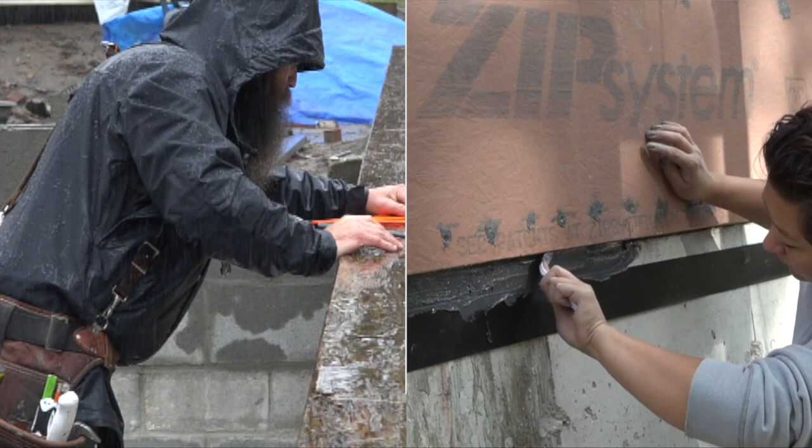Airtight walls in the real world. WRBs, flashing and redundancy. Now that we've gone over the basics of how heat, air, and moisture can move through building assemblies, or at least how they work, we can look at how to control them and make them do what we want.

So I'm going to explore a couple of ways to improve the layers that are already in the blueprints, starting on the outside of the wall with the house wrap, or WRB, as it's called in the code. In the code, they call a WRB a water-resistant barrier, but building scientists call a WRB a weather-resistant barrier. The main difference is that weather includes wind and different pressures. So a weather-resistant barrier incorporates wind and air pressures into the performance of that outer layer, which is protecting the framing. So first we'll look at house wrap as a WRB.

House wrap initially is a water-resistant barrier. If you want to upgrade it to an air barrier, weather barrier, you can just do a couple of little things to make it much more airtight. As usual, the tricky stuff isn't in the middle of the wall where there's no action, where there's no windows, no holes. The tricky stuff is where two different things meet or two perpendicular things meet. So like where wood and concrete meet or where a roof and a wall meet.

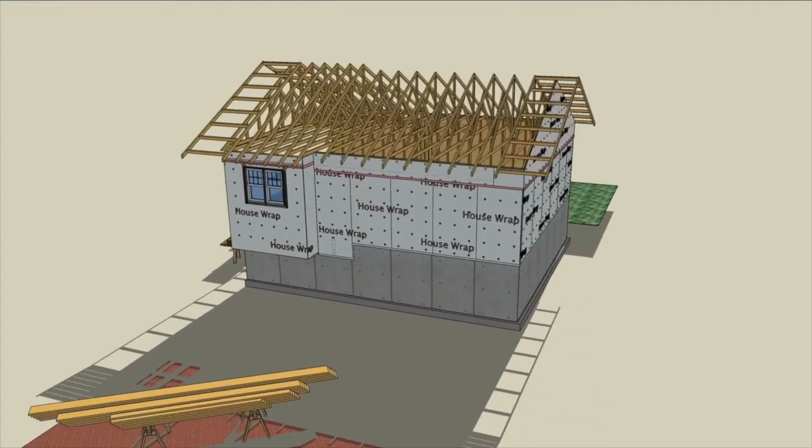So this is an animation based on Doug's installation advice for house wrap and the basics of controlling water and air. Weather barriers done right means weather barriers that go to work on more than just the sunny days. Weather includes moisture, wind, and rain, so it makes sense that a weather barrier would aim to stop all of that, because it's not always sunny like it is in animation land. Begin at the bottom of the wall where the house wrap is sealed to the foundation with silicone caulk to bridge the gaps between wood and concrete.

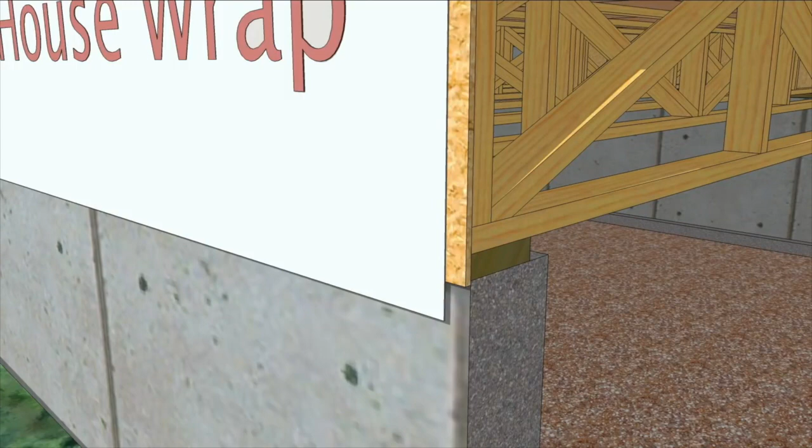Anyone who's ever run siding knows that if the house wrap isn't tight in the corners, it'll get sliced with a utility knife. So get it tight or say goodbye to your air barrier. Overlap the vertical seams 6 to 12 inches.

Here, the house wrap is run all the way into the corner and the next piece run out about 1.5 feet because there's a couple of wall elevations at the bottom and the installers wanted to get a good overlap. Tape the seam with contractor tape.

Run a bead of caulk along the top of the wall to seal the top of the house wrap. Sometimes it's easier to do this after the house wrap has been placed. Either way, overlap the higher pieces in front of the lower pieces so that water is always directed out.

And don't stop at the top of the insulated space. House wrap is the drainage plane on gables too, so it has to cover all of the wall sheathing.

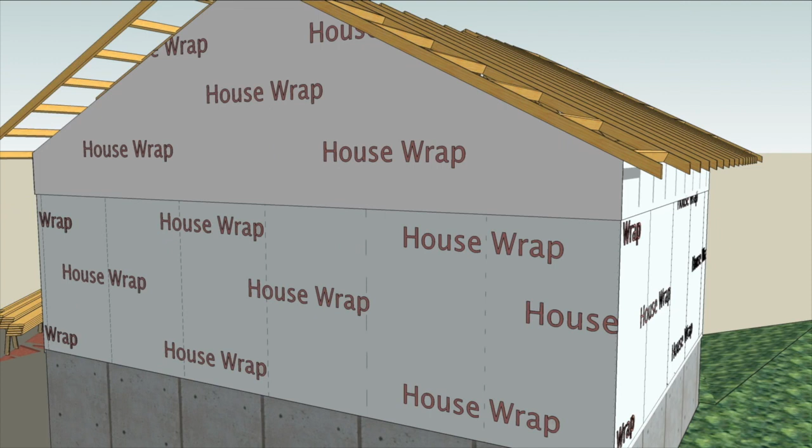It's a good idea to tape the seams before going too crazy with the cap stapler because a partially taped over cap can become a water injection system into the tape, which can become a trough for sideways water movement. So keep the cap staples away from the tape.

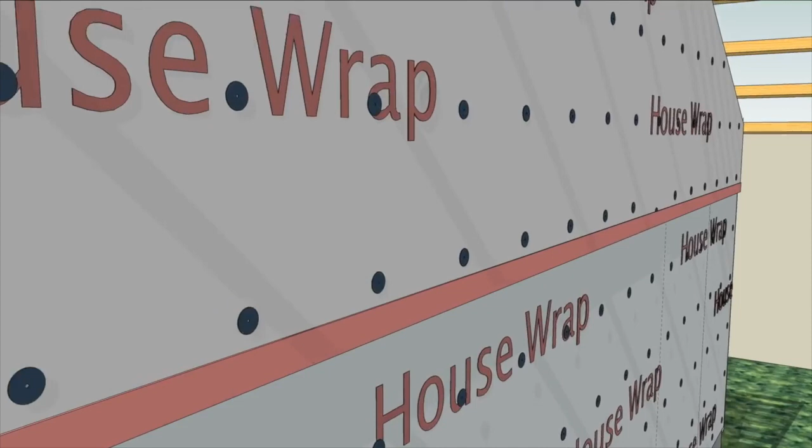The same is true at windows where there's a lot of flashing tape. Keep the cap staples about 1 foot away from the opening on each edge and leave plenty of room to splice the window into the wall.

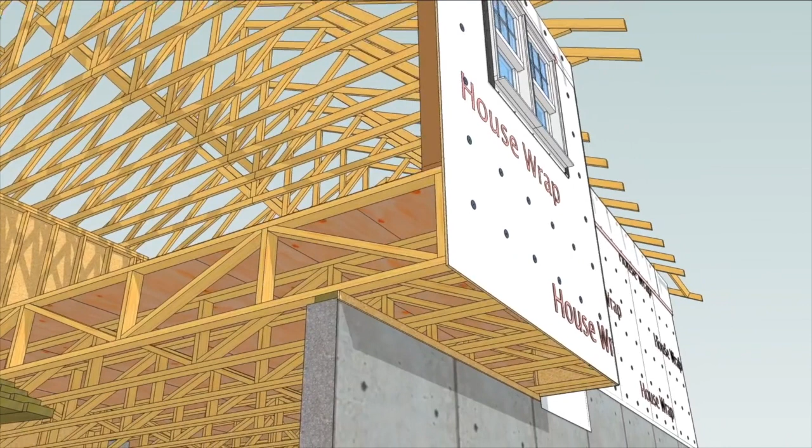Another sneaky spot that can turn into a massive air leak is a cantilever. At a minimum, cover this opening with house wrap, but something rigid is better, like wall sheathing. Of course, both sheathing and house wrap is best, and that detail is a topic for another video.

So that's sort of a how to do it in the perfect world animation. But unlike animation land, the real world has mud and ladders and guys with tattoos climbing ladders with mud on their boots. So here's a real crew doing it in a pretty good sized addition to a 100-year-old house that I shot a little while ago.

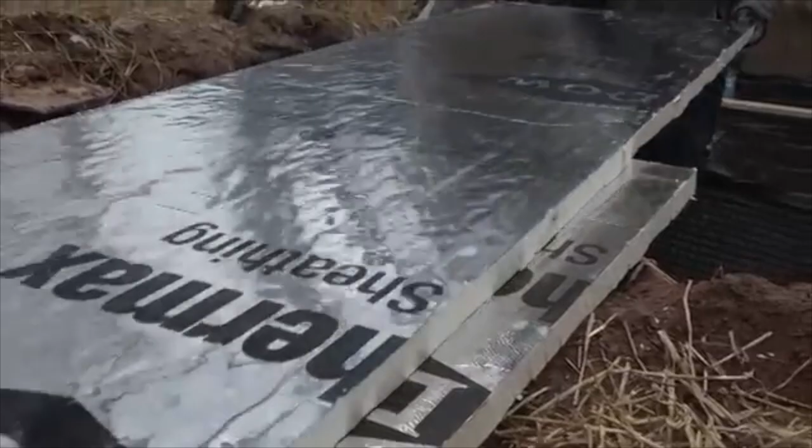Last week, we made a cold, wet hole into a warm and dry crawl space using Thermax polyiso foam board and smart plastic strategies. Because we found that when we do this and we have the gravel down, as you're working on it, you stretch it out and you're walking on top of it, sometimes you can start to tear, rip, or puncture your plastic.

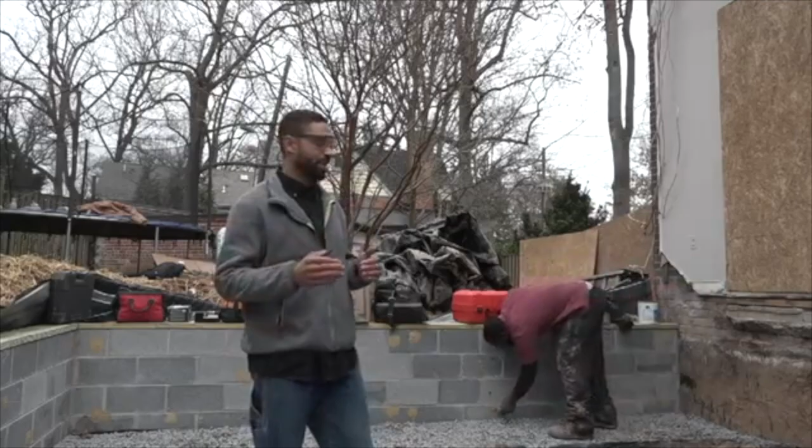So what we do is we take some of the leftover stuff that we've got, put a couple strips down, so that way when we put our 6 mil or 8 mil on top of it, and you're walking on top of it, you're not actually creating holes in your vapor barriers. They sealed the new crawl space to the old building with Great Stuff and moved on to the framing.

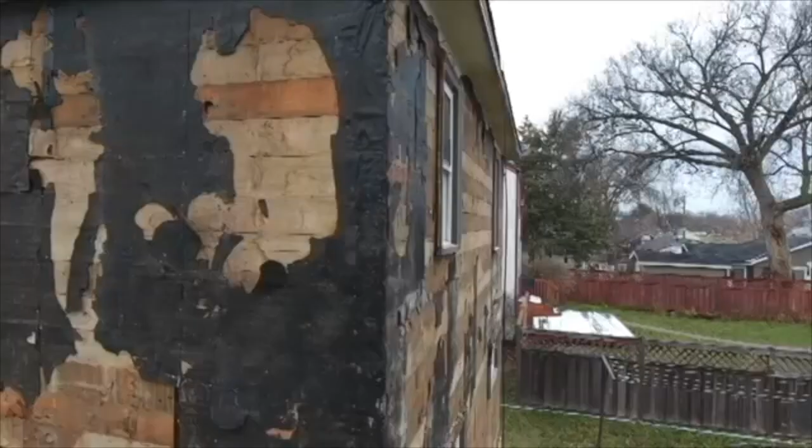In this episode, we're going to learn why the WRB is such a BFD. What we're talking about today are weather-resistant barriers. Back in the day, that used to be tar paper. Tar paper would dry out and crack. It did not handle weather or UV very well. Nowadays, we have longer spans between putting up our siding and our windows and doors.

Important factors about the WRB, weather-resistant barrier: it's an air and water barrier. So when it rains, the rain drains down the side of it. It's going to continually move water away from the house.

Another thing that's really important about a WRB is its permeability, which means the amount of vapor that it can transfer through. A lot of times during construction, it's built during rainy days or weather, and you want that plywood to be able to dry out and not be stuck behind a vapor barrier that won't allow any moisture out. Okay, let's pause a second to make a point of that.

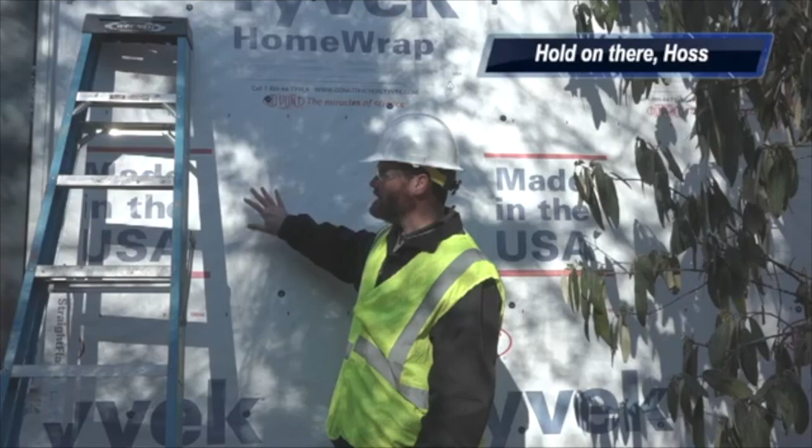Pro Tradecraft travels all over the country to job sites, and we see this on blueprints a lot. In fact, Tyvek is not a vapor barrier. It allows vapor to pass through it and dry out through diffusion.

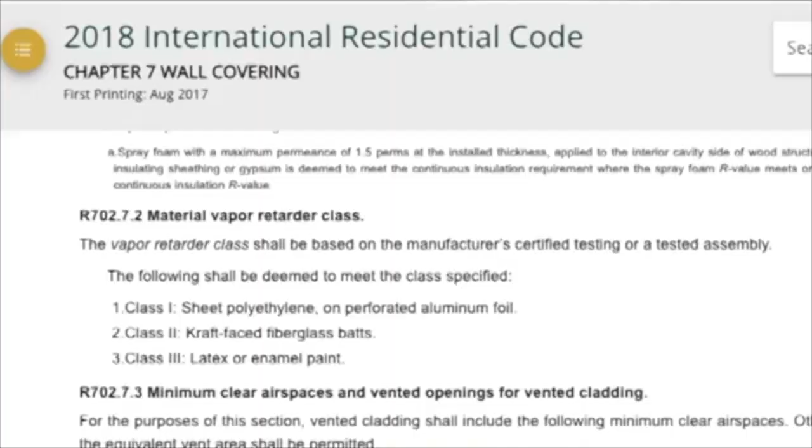A vapor barrier would be like a solid piece of plastic that is not going to allow any air or moisture through it. It is a water and air barrier. It allows vapor to pass through it through permeability. Tyvek is not a vapor barrier.

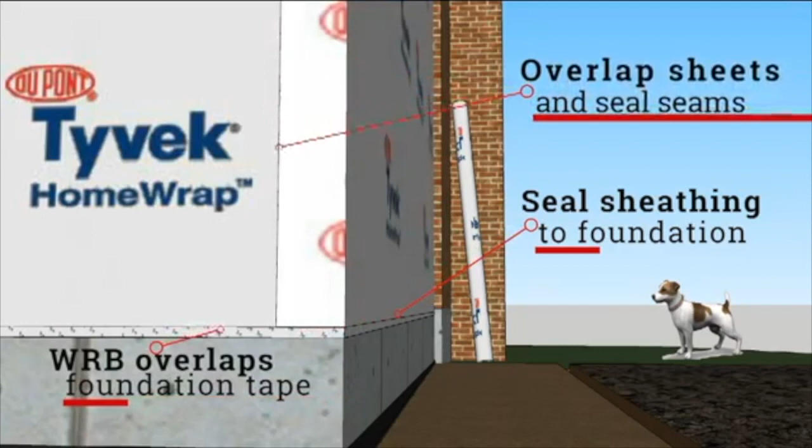Now that we've cleared that up, let's move to animation land for a strategy session. The general strategy for using house wrap as a water barrier is to cover all the seams and gaps in the exterior sheathing, overlapping correctly. To upgrade Tyvek to an air barrier, seal the top and bottom as well as the vertical and horizontal seams.

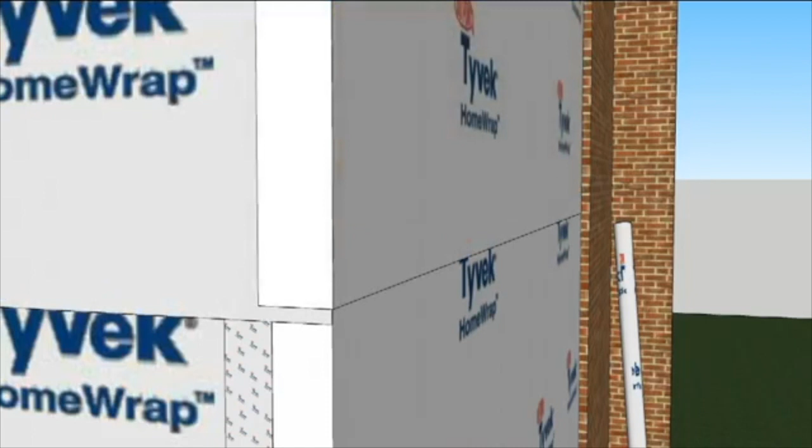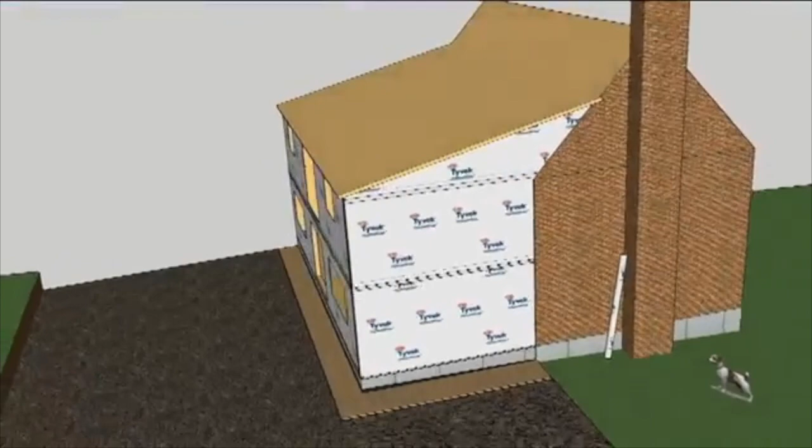Each layer should overlap to the outside so that water is continually directed away from the house. Seams are sealed against air leaks, and the WRB should extend all the way to the bottom of the roof deck for a continuous air and water barrier.

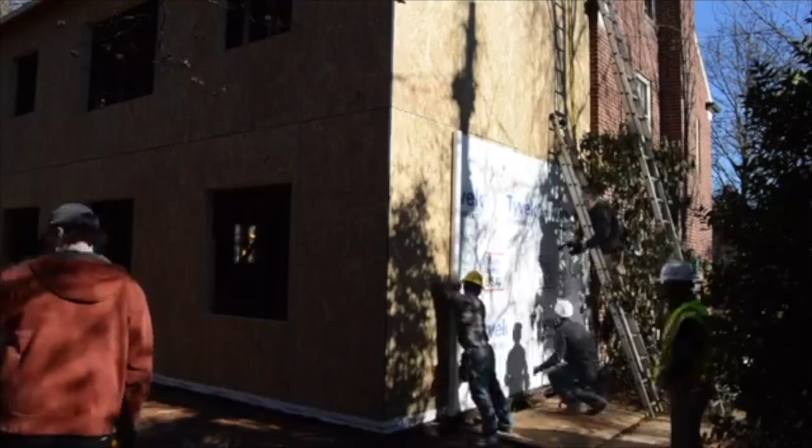Begin the process at the bottom. Make sure to seal the wall sheathing to the foundation with flashing tape. The WRB should overlap that seal. Next, they staple the bottom corner, tack the top, and then roll out the Tyvek, aligning the bottom to where it should be and stapling minimally to make sure to get a smooth, tight fit.

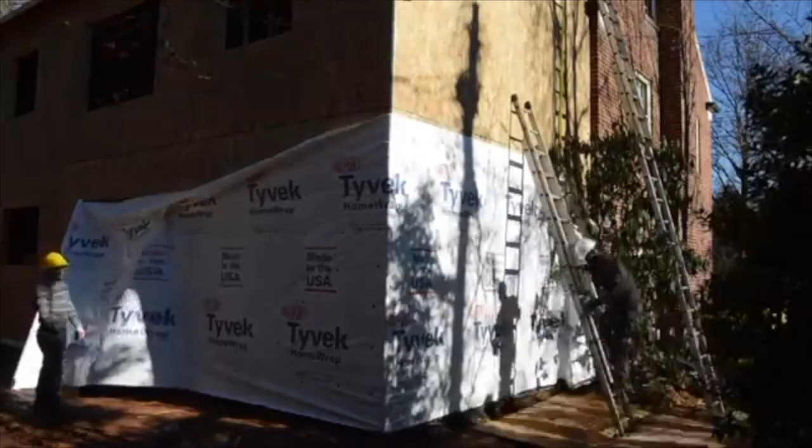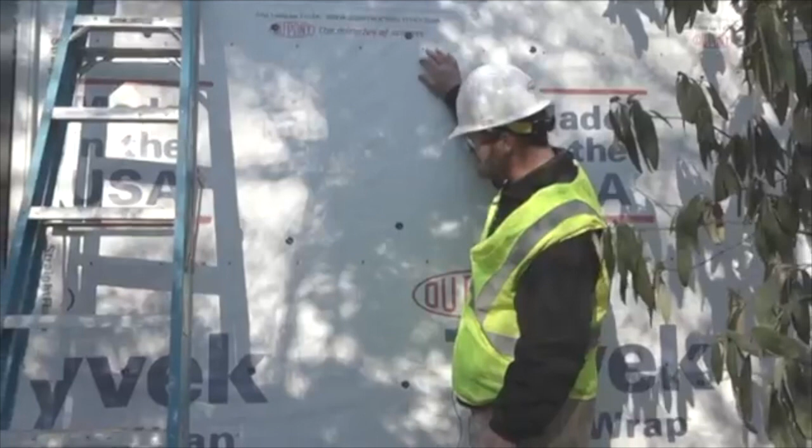With the bottom tight, Ray works his way up the sheet to staple it off using a cap stapler. There are several reasons here to use cap staples and cap nails. A larger area of space holding it to the building, therefore less likely for wind to rip it away. Secondly, as water travels down the building towards the cap, it is more likely to hit the cap and travel around the staple instead of an old school slap stapler that may have damaged your WRB and provided an opening for water to get in.

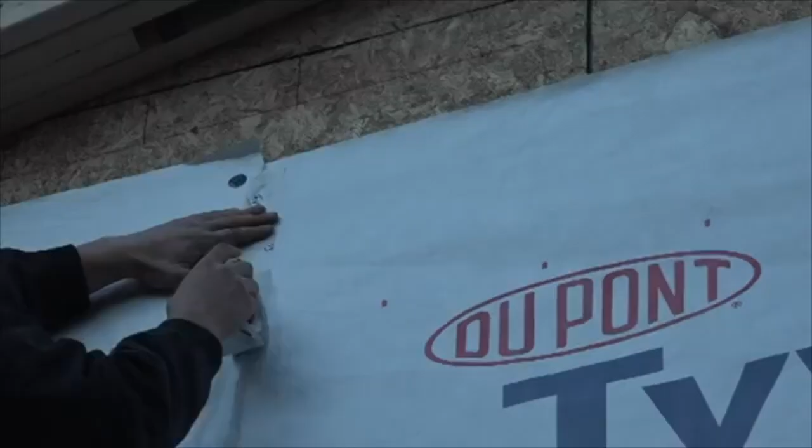Another thing just to be careful of when you're putting in your cap staples, you want to keep this away from any of your flashing. Anything where your flashing is going to go up against it and create a void behind it provides an area for water to leak in. You also don't want to run your seam tape over top any of these caps, as that will provide bad adhesion and water can work its way into the building as well.

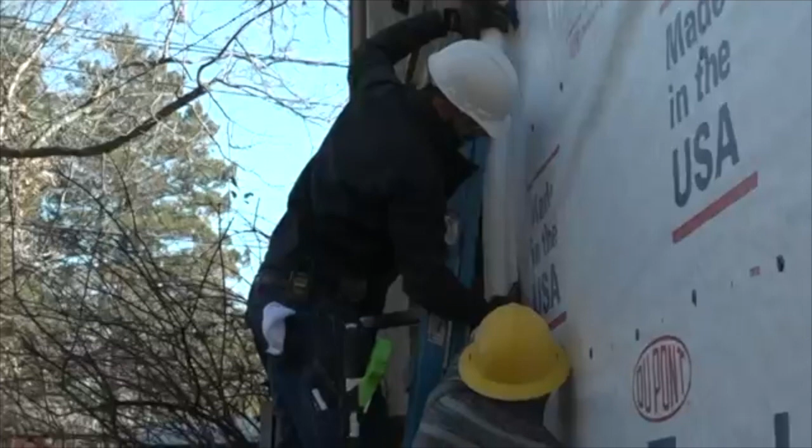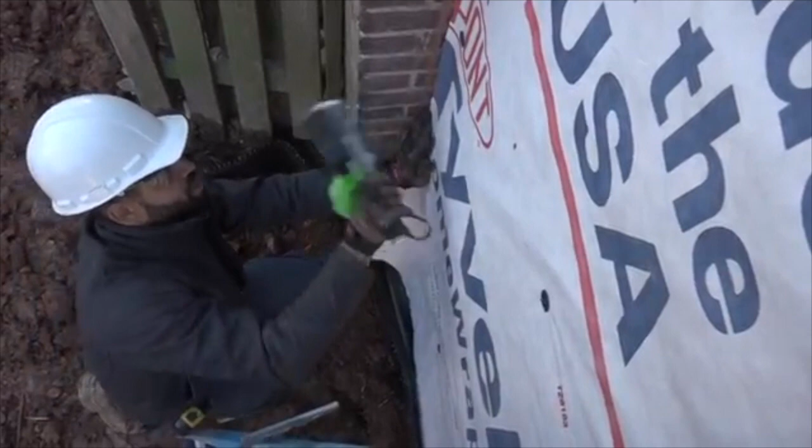At the end, where the WRB meets the existing house, they cut the Tyvek tight into the corner and staple it home. Later, they'll cut about an inch off the end of the Tyvek and use flashing tape to bridge the WRB to the wall sheathing for an airtight connection. Ray can finish off the stapling now that the WRB is where it ought to be.

On this next row here, we're going to overlap a minimum of 6 inches. In most building practices, you want to overlap every product that you put on. That way, if water runs down the front of the building, it's going to continually be pushed to the outside. You never want to have a situation of reverse flashing, which would direct water into the building where it cannot dry out.

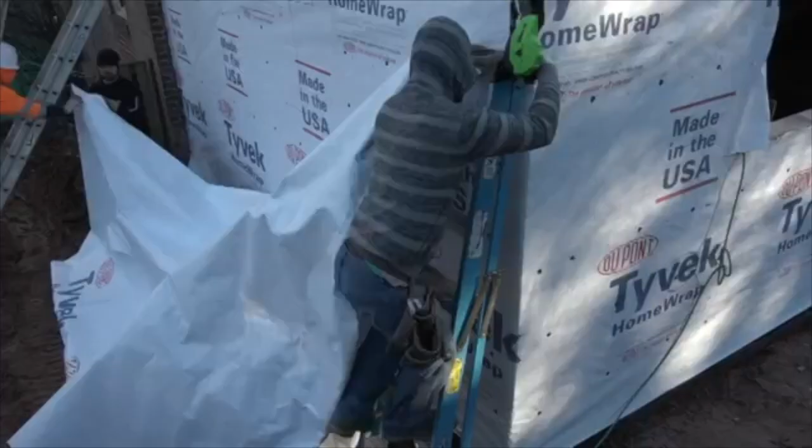They cut the pieces to length on the ground and then install the upper course off ladders, stapling the bottom in place first and then moving up. Victor puts a couple of staples in the top corner, holds the sheet tight, and then moves to the opposite end to pull it into place. With the corners tight, he can staple off the bottom and the field, spacing staples about every 16 inches.

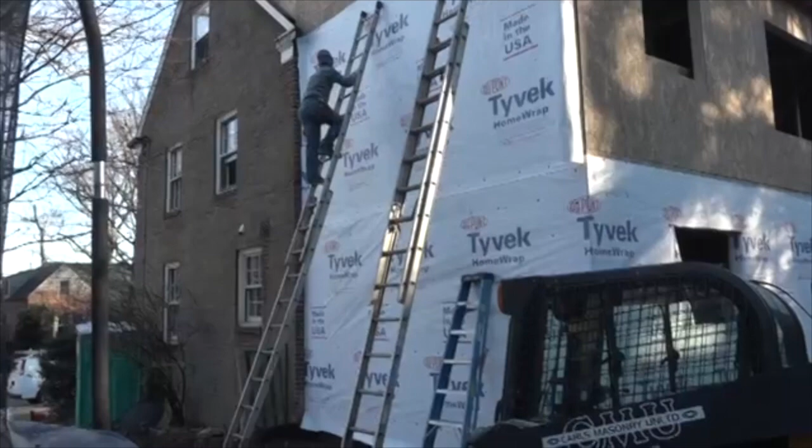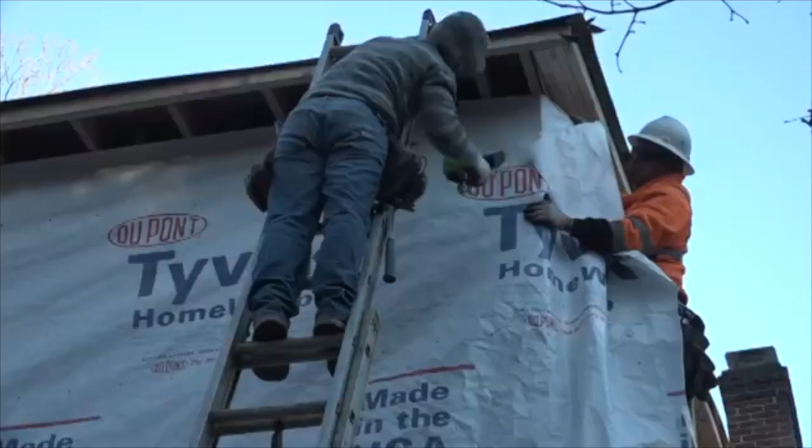The same process holds for the other walls. Cut the sheet to length on the ground, fasten the bottom corner, and then align the top corner. On this wall, Victor can wrap the corner, beginning at the top, moving to the bottom, and then hitting the in-between parts. They pull the bottom tight, staple it, and move to the last corner, the top right. Sometimes you need to adjust from where the initial staples were, which is one reason not to staple in the field until the whole sheet is in place and in good shape.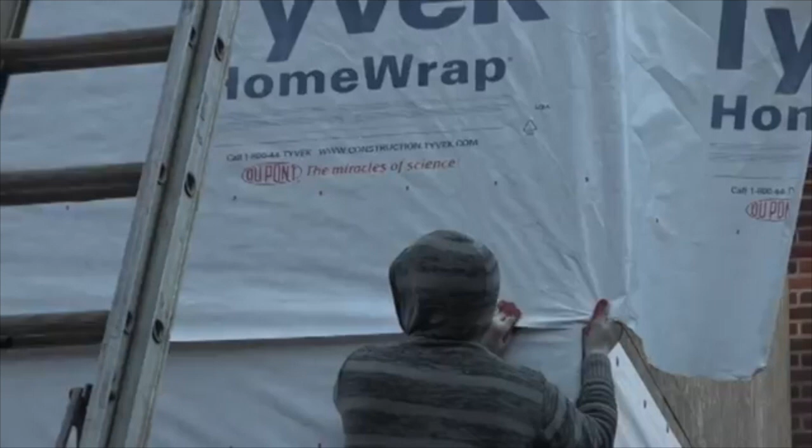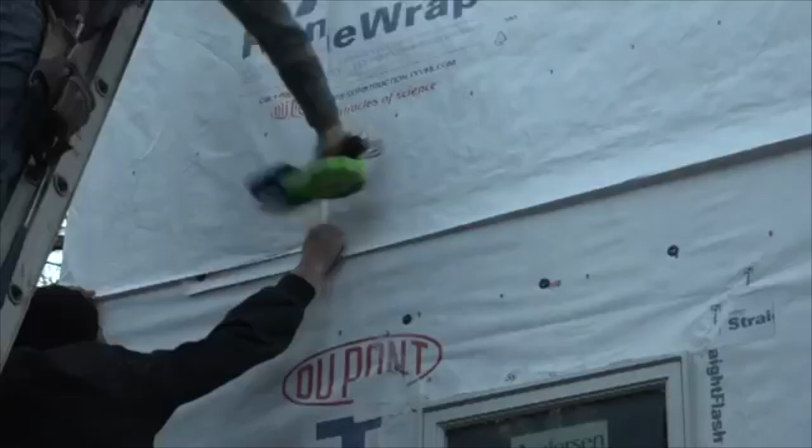Again, overlapping the corners at least 6 inches stops sideways wind and water from sneaking into the wall system. Seams are taped against air leaks, being careful not to tape over a cap staple, which can cause a fish mouth in the tape. A J-roller or squeegee will wet the adhesive of the tape into the Tyvek. Most construction tapes and flashings are pressure sensitive, so it's important to roll them onto the substrate.

Finally, they fill in the gable end the same way they did the rest. Cut it to length, place the bottom of the sheet, spread it out. In this case, they cut it in place, staple it off, and seal the seams. With the final piece in place, that's what we call a wrap. For the day and for the house.

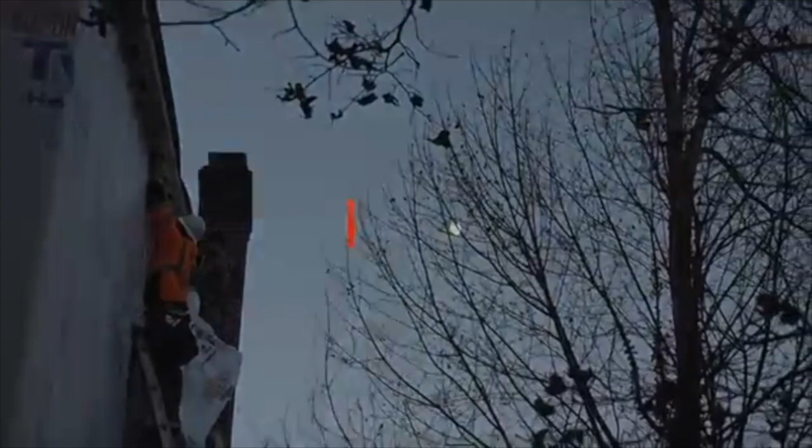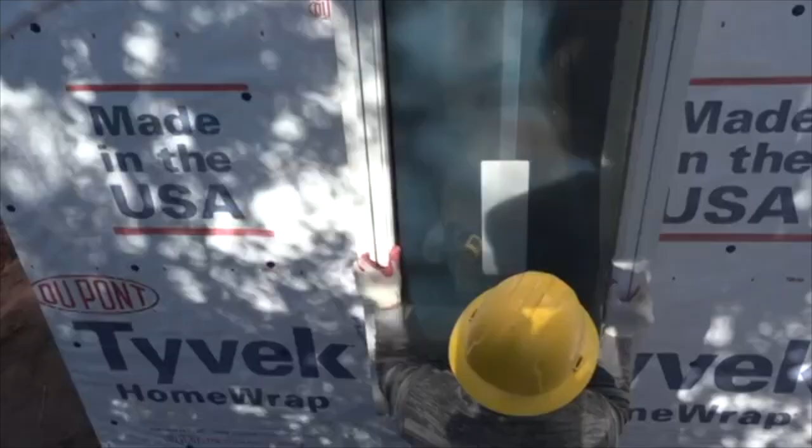With a perfectly installed WRB, we're ready to cut some holes in it for windows, which will be flashed and sealed into place for an airtight, watertight seal. And we'll do that in depth in the next episode of Weatherization Nation.

So that's WRB that comes on a roll, house wrap. Not all WRBs come on a roll. Some of them are already part of the wall sheathing, like ZIP System sheathing, the green stuff and brown. And now I think LP has a version of that too. I think it's called WeatherLogic, kind of bluish color.

So the critical part of these systems is sealing the seams in the panel and dealing with holes and transitions. This is done either usually with flashing tape or more and more with fluid applied flashing products. And the brands are usually proprietary to the system that you're using. So the tape or the fluid flashing becomes a really important piece of the air barrier and the water barrier of this wall, the control layers.

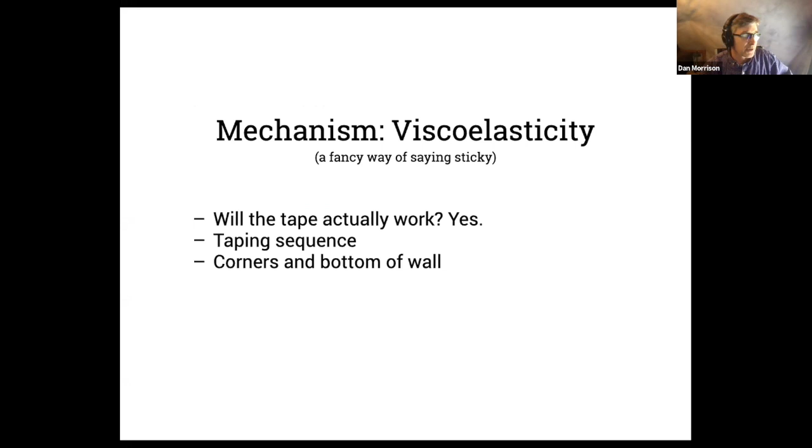So many people think that what causes tape to be sticky is some sort of a chemical reaction or a chemical bond, but it's not that. It's actually like a physical three-dimensional bond, like what you get with lath and plaster, where the plaster keys into the lath substrate. And viscoelasticity drives that three-dimensional bond. Viscosity of an adhesive is what allows it to wet out into the substrate. And I say wet out, I use air quotes because it's a term that engineers use.

Elasticity is what allows the adhesive to resist separation when a force is applied to it. So the tape needs to stick to the wall sheathing, but the adhesive also needs to stick to itself. Otherwise, the tape would fall off and you just have a bunch of sticky gunk on the wall.

So there's basically two molecular forces at play: adhesive forces and cohesive forces. The adhesive force bonds dissimilar molecules together, so the tape molecules and the plywood molecules, kind of like the tongue in the flagpole, but different. And the cohesive force holds similar or the same types of molecules together. So the adhesive molecules are attracted to themselves. Adhesion sticks the tape to the wall, cohesion keeps it there.

Most of these tapes are pressure sensitive adhesive. So people often overlook the need for applying the pressure to get the tape to stick. But it's that pressure that activates the viscosity in the adhesive, and it allows it to flow into the substrate, whatever that substrate is, OSB, framing lumber. So you need pressure to engage or get the adhesive moving so that it has the ability to wet out into the substrate and work its way into the voids of the material.

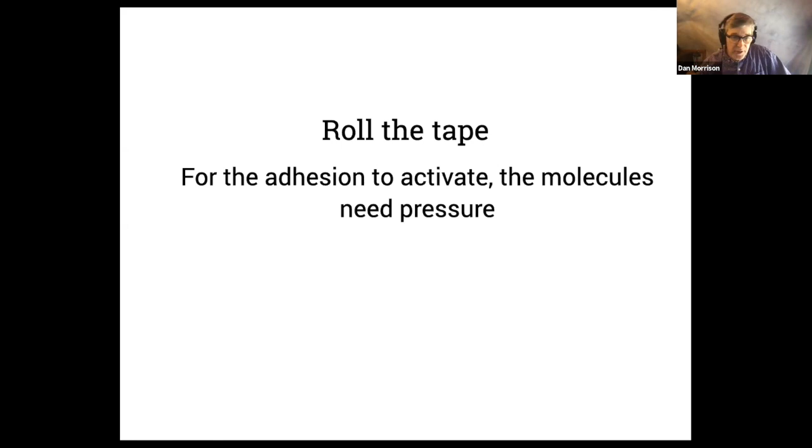Now let's look at some practical information. For walls without house wrap, like the green walls with baked-in WRB, you can't overlap house wraps over the penetrations. You need to use tape or liquid flashing. So here's a quick animation on how to flash various penetrations in a wall like that.

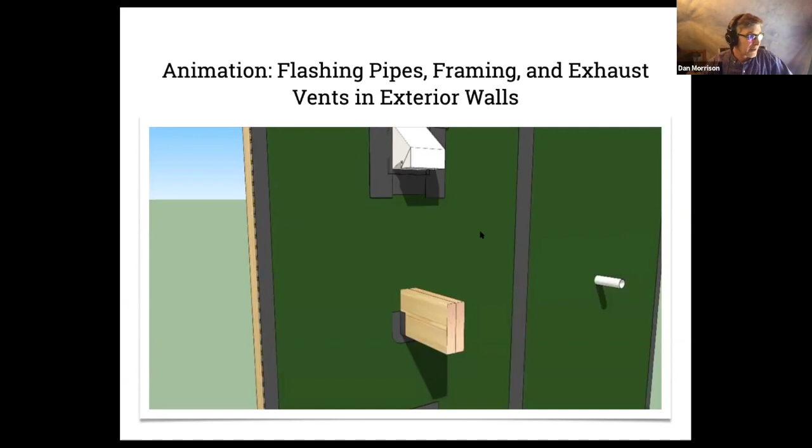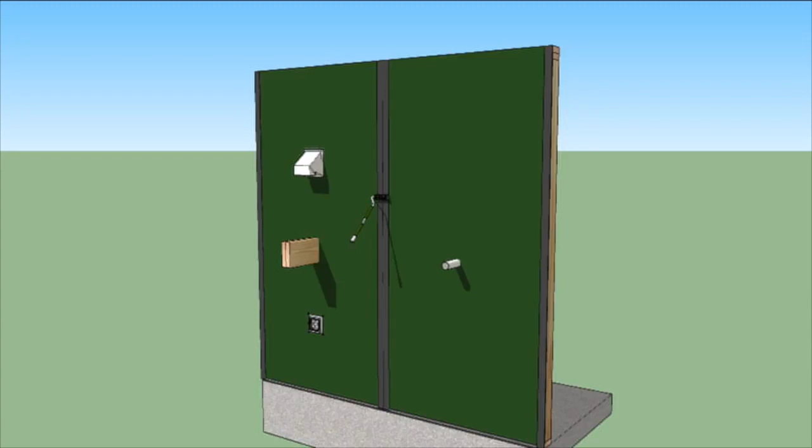If you use wall sheathing with a pre-applied weather barrier, such as ZIP System, or if you paint on the weather barrier, then you may be at a bit of a loss on how to seal holes through the walls made by others during the course of construction. The first thing to do is tape the seams of the panels to keep air and water out. Use a J-roller to make a solid bond. Many of these tapes are pressure sensitive, so you really need to mash them into the sheathing.

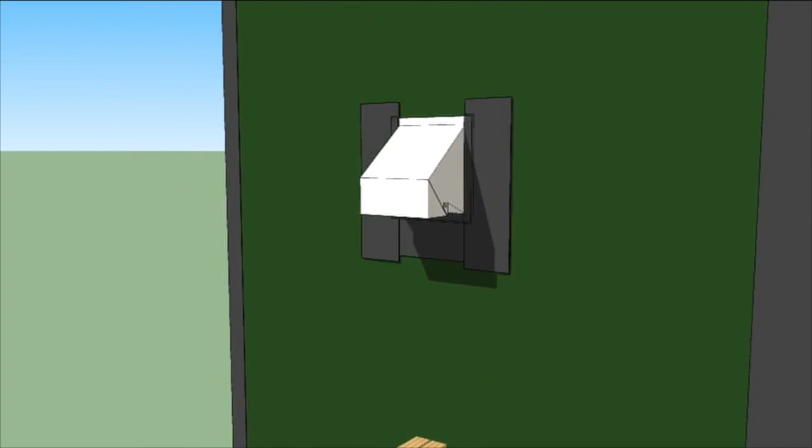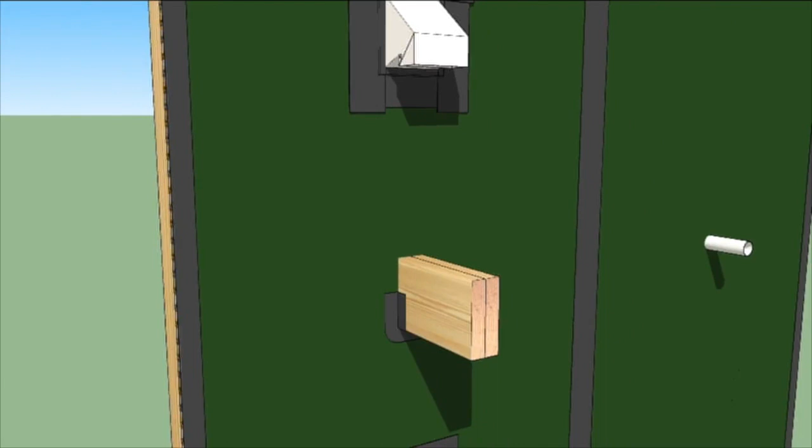The simplest way to flash an electrical box is to tape the bottom, the sides, and then the top, in that order. Other box-shaped penetrations should be flashed the same way. Bottom, sides, and then top. Framing that penetrates through a wall needs some sort of saddle flashing. If you have fancy stretch tape, just flash the bottom of the framing to the wall and then flash over the top. Again, it's important to apply enough pressure to activate the adhesive on the tape.

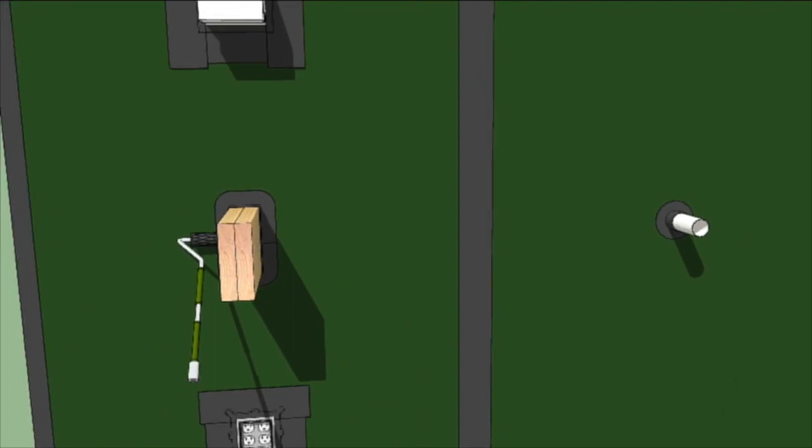Sealing a pipe through a wall can be done with a single piece of stretchy tape, which is far easier and cheaper than flashing boots. The rule of whoever cuts the hole has to seal it up can be made a lot easier and more predictable if all the subs know where to look for the flashing tape. So that's a good little tip to make it a rule on your job site. Whoever cuts a hole in the envelope has to seal it up, and just make sure they know where all the sealing materials are. Maybe it's a little box in the job trailer or something.

So again, we'll add some real world job site footage to the Perfect World Animation Land. This is a job site in Maine, sealing the connection between the foundation and the wall. In the house wrap videos, they showed sealing the house wrap to the foundation with caulk, and that's how we did it in the animation. Then in the video, they did it with tape. As long as it's sealed, it's good. Because there's no house wrap in these panels, the gap has to be sealed instead of covered. And so Liz uses liquid flashing to seal the sheathing to the bottom plate and then also to seal the bottom plate to the foundation.

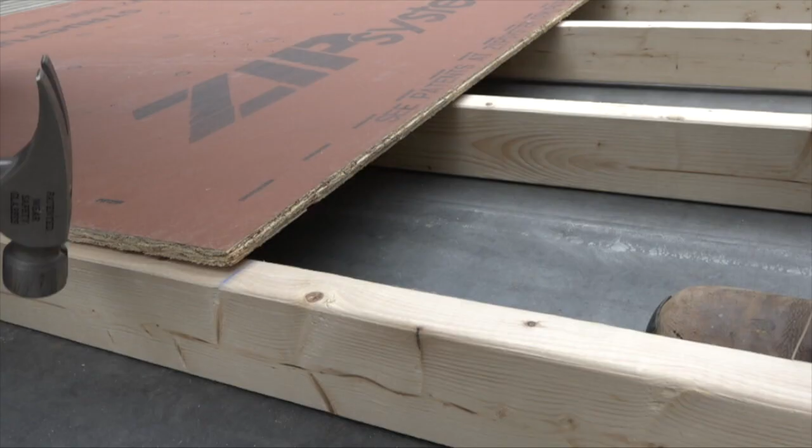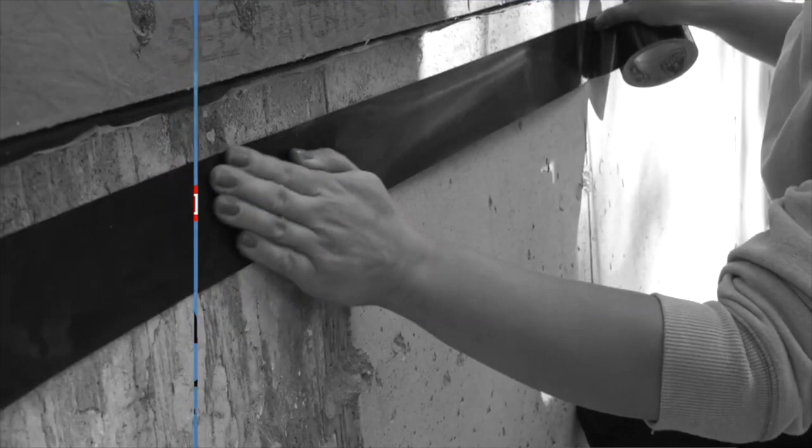In previous episodes, we installed wall sheathing and taped the seams between the panels. This episode focuses on another super important place to detail the air barrier, where the walls meet the foundation. Liz snaps a line about 1.5 inches below the wall sheathing and uses duct tape to mask off the line. She masks off about 10 feet and then turns to the tubes. The first bead goes directly under the wall sheathing to seal the sheathing to the bottom plate. Because you want to get one right up under the sheathing and then one around the gasket. Run additional sealant below to bridge the space between the foundation, sill gasket, and framing.

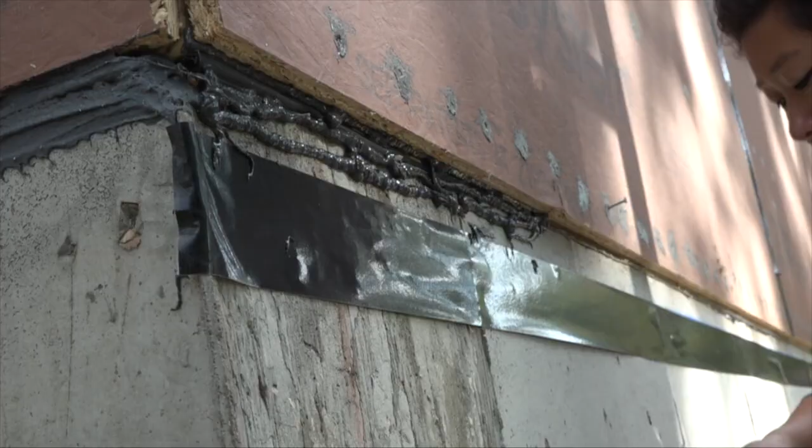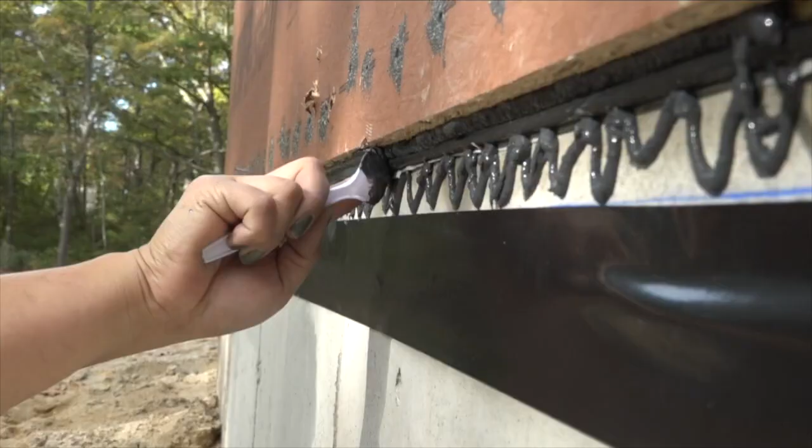I'm going to take our high-tech spoon. The best way to get a clean cove-like fillet bead of sealant is to use a cheap plastic spoon. They're flexible, rounded, and free. When the sealant is worked into the upper gaps, the lower edge is smoothed out with a plastic squeegee. She works in about 3-foot sections so that she can move her whole setup and not have to walk back and forth. Working her way down the wall, she squeezes sealant, spoons it in place, squeegees the excess, and finally peels the tape. When peeling tape off a wet edge like this, pull the tape slightly toward the wet edge. This will fold the sealant back on itself rather than pulling it down over the line.

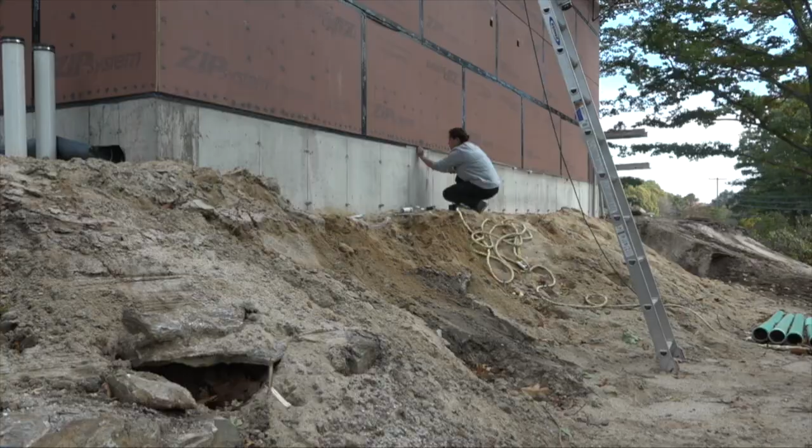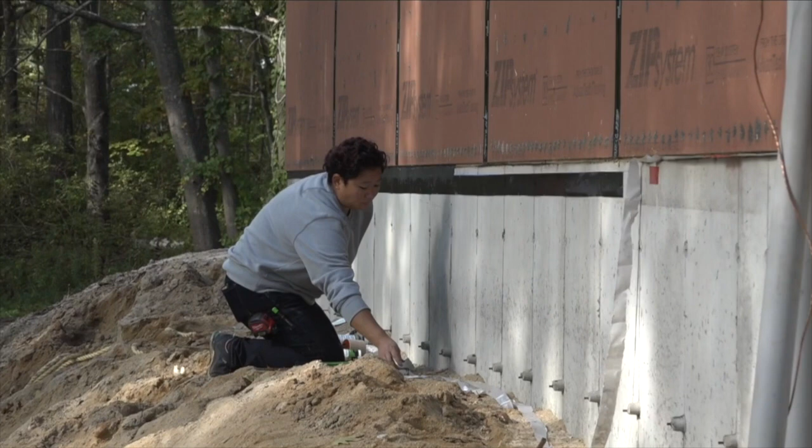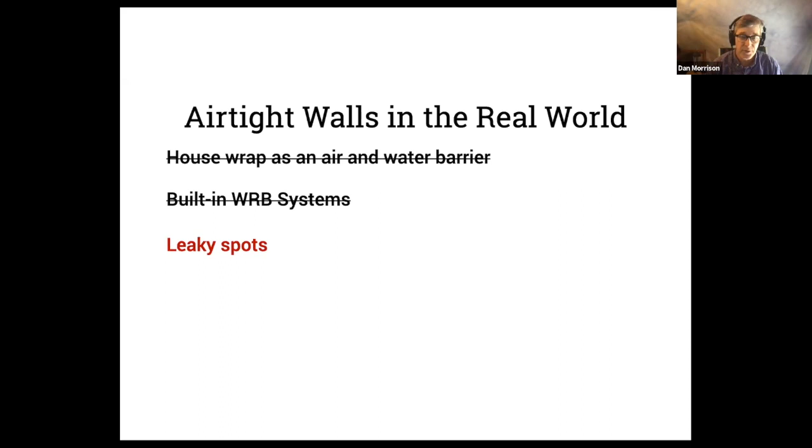After the first section of wall is done, she begins the next section, taping the line, sealing the gap, smoothing the surface, and repeating all the way around the house. Okay. As we saw, a leaky spot in houses is where the wall sits atop the foundation. And sill seal isn't the be all end all answer because there's a lot more cracks, gaps, and holes there than meets the eye. It's not just the joint between the wood and the concrete. There's a bunch of wood meeting each other and butting into each other and nailing into each other. So because of the location of this gap, it's especially susceptible to sucking air in to replace any lost air due to stack effect and leaky ceilings. So let's take a closer look at that.

The joint between walls and foundations runs the entire perimeter of the house, obviously. And according to Building America Solution Center, this is especially important for two reasons. One, because the concrete surface is sometimes rough, preventing a smooth seam between the foundation and sill plate, which we've talked about, and because of stack effect, which naturally pulls air through the lower part of the building where the sill plate is located. So here's a little drawing that I made.

I also made a little animation illustrating how to seal these. There's 5 layers of protection against one leaky joint, basically. Any one or two of those is going to improve your building's performance. There's probably a gajillion other ways to do it differently. And if it works, then it's right.

Before developing that little animation, I asked Pro Tradecraft's technical committee for their input on how they do that part of the house. Some of the suggestions were to upgrade from off-the-shelf sill seal to a high-performance sill gasket and seal the foundation to the mud sill. So some of them are EPDM gaskets. Some of them are T-shaped, where part of it goes under the mud sill and then there's an adhesive that attaches to the foundation and to the wall sheathing.

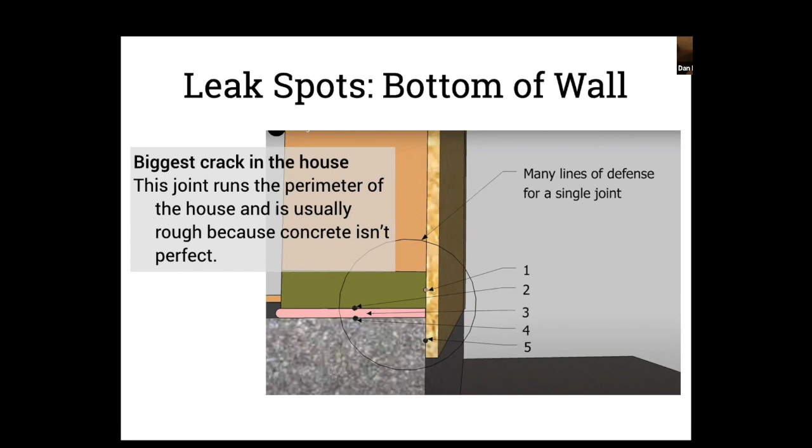If the wall plates are not flush with the foundation all the way around, meaning that the walls are square but the foundation isn't quite square, which happens in the real world a lot, just use a low expanding foam in those gaps to seal that up. The bottom line on the bottom plate is that multiple layers of sealing will substantially reduce air leaks along this important part of a house. It'll improve comfort, durability, and energy efficiency.

I'm going to turn my phone off. Someone's texting me.

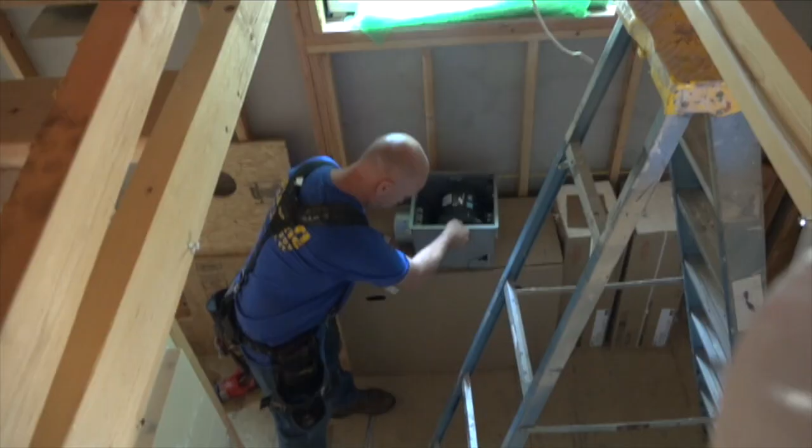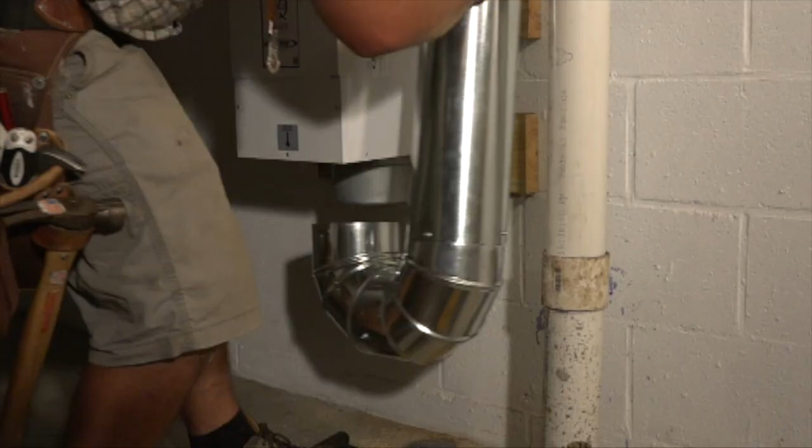Last time on the Model Remodel Show, we were pulling fans out of boxes and putting them in the house. The bath fan went above the shower unit, and then Ben installed the supply fan in the basement. He played a Rubik's elbow ductwork game before sealing the seams in the ducts with mastic.

The Air King Q-Fresh supply fan pulls in fresh air and pushes it into a distribution box in the attic, where it supplies various rooms with fresh air. The Q-Fresh fan will be synchronized to a constant low-flow exhaust from the range hood, giving a balanced ventilation system for the tight little house that is Professional Remodeler's 2017 Model Remodel.

This week, we're going to get out of the basement and get up on the... Seems like no one's around today. Well, okay. We'll take this opportunity to look back at the project from the start and get a sense of some of the smart, energy-efficient detailing on this tight little house.

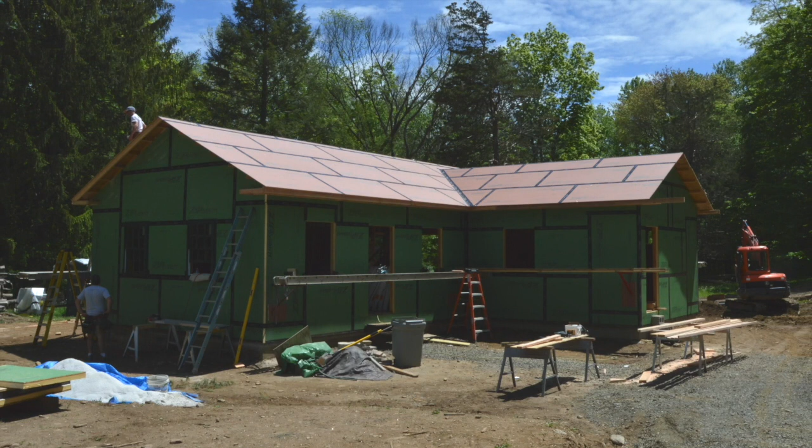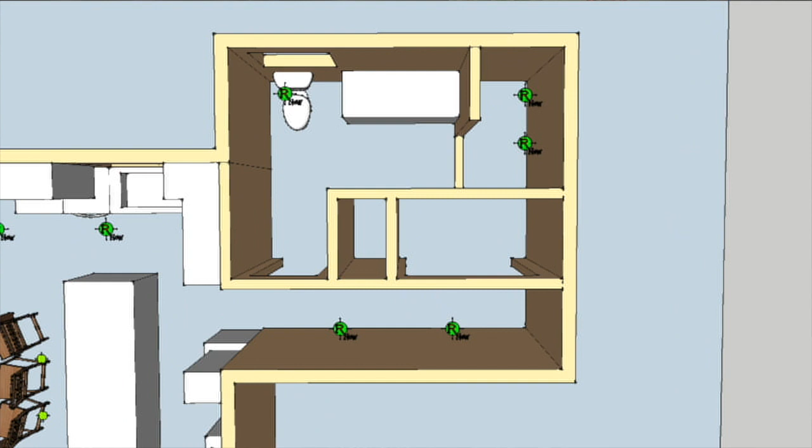We began late right out of the gate due to a late winter snowstorm. We were hoping to have this project started about 4 weeks ago. Initially, we had started out hoping to keep about 2/3 of the structure. The future bathroom and laundry we knew was going to be coming off, and the section where the new kitchen is going to sit, we thought that would be coming down to foundation.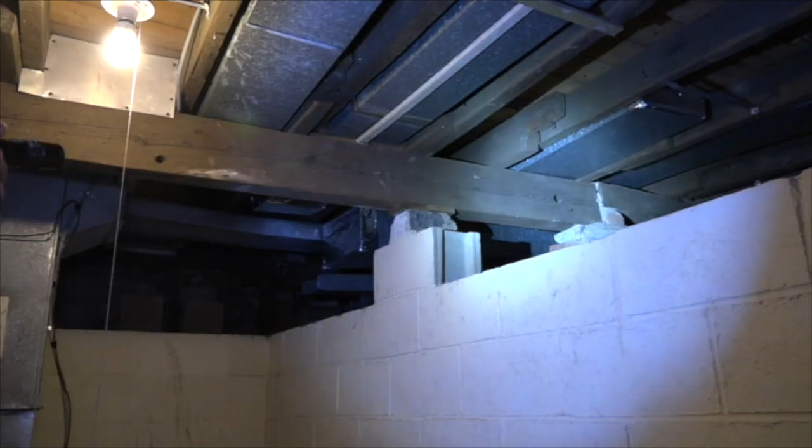Over the winter, as we came in and did a little site survey work and looked at the building a little bit closer and started to weigh some costs, the amount of time that would have been soaked up in that process quickly started to outweigh the costs of going down to bare foundation. So they methodically cut the house into pieces, chained it to the machine, pulled it apart, and set it aside, beginning with the roof, plucking up the walls, and removing the floor.

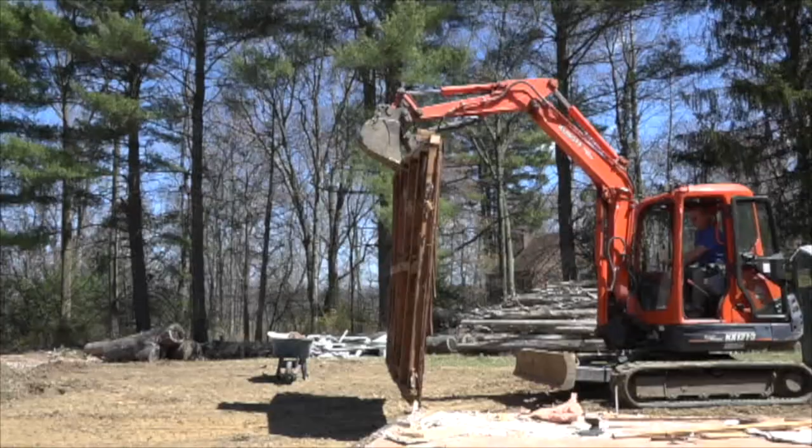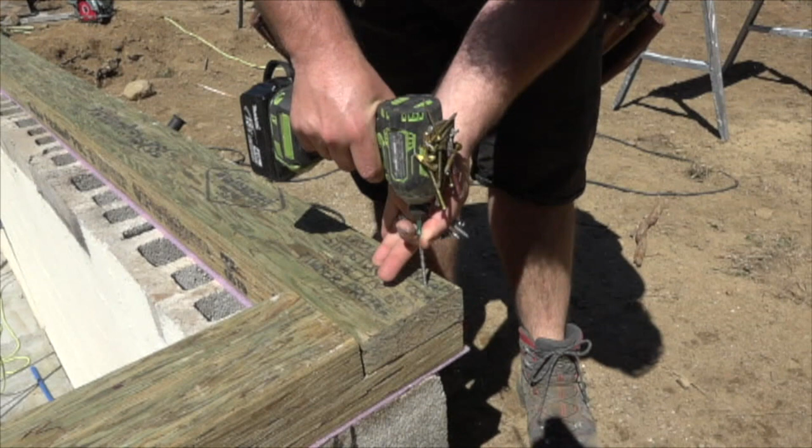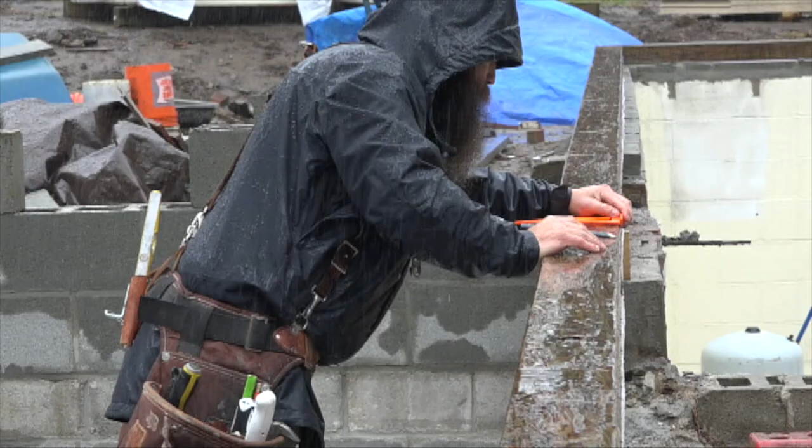Going down to the foundation also means that air sealing is much easier because it's basically new construction above the foundation. Because of the humpy-bumpy foundation, they used extra thick mud sills to span the valleys and corners to provide a rigid base. After the mud sills were shimmed level, the masons filled the gaps with grout. A few steady days of rain set us back again, but Ben showed up anyway to lay out the floor frame.

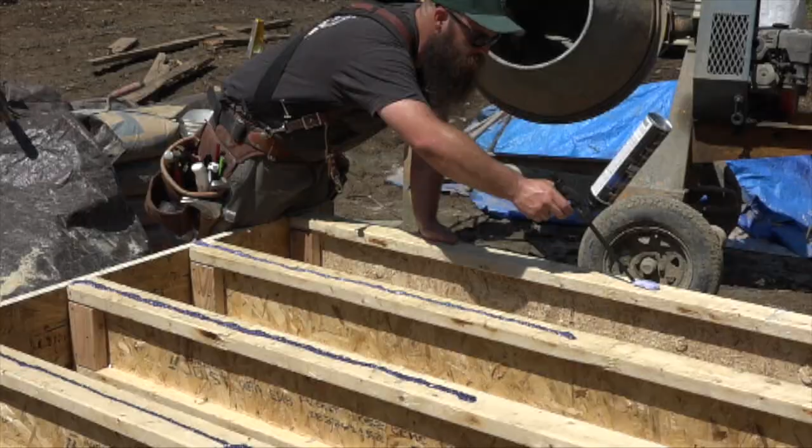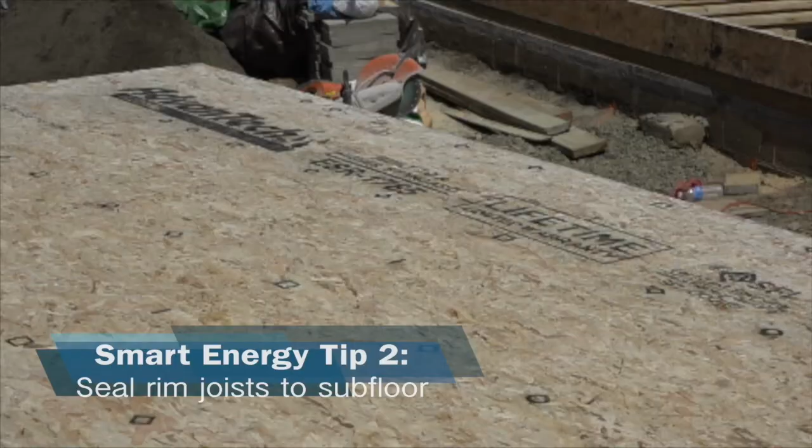One critical place for air sealing is the floor frame assembly, because everywhere that two materials join is a gap that will leak unless it is sealed. Ben seals the rim joist to the mud sill with adhesive, and then he seals the corners as long as he's at it, bedding the rim in glue. Subfloor adhesive is sometimes left off at the perimeter because the floor won't squeak under exterior walls, but that creates one of those continuous gaps that leak. So Ben hits the perimeter before adding subfloor.

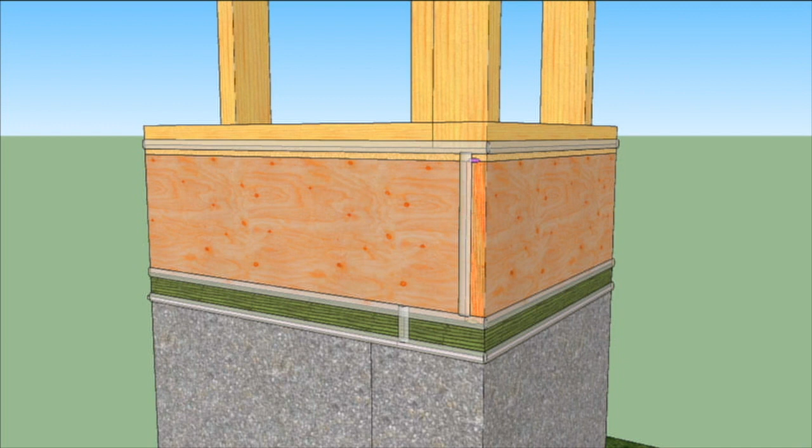Here's a recap of the airtight floor system. There's a sill seal gasket between the foundation and the mud sill. The rim joist is bedded in glue atop the mud sill and at the corners. Zip's subfloor adhesive seals the perimeter, and the AdvanTech subfloor caps the assembly. Next, we'll frame walls on top using Zip System R12 sheathing sealed to the foundation, bridging all those gaps, and taped at the corners and joints.

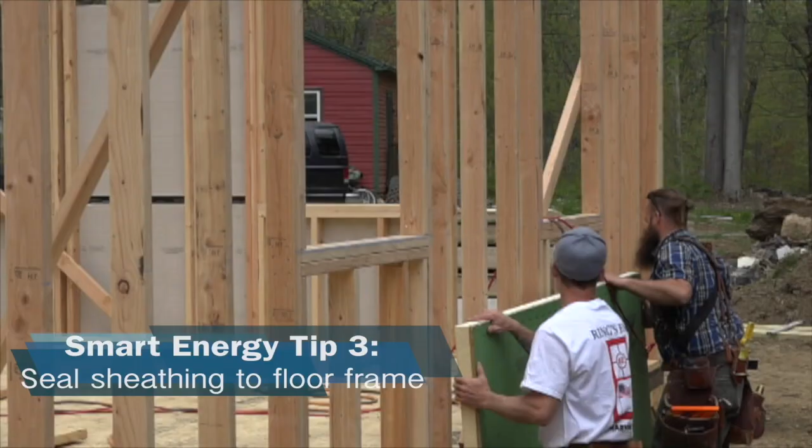The exterior insulating panels are another energy-smart step. They allowed Ben to step down from 2x6 studs to 2x4s, with almost no heat loss penalty. The panels are located to bridge all of the framing gaps down to the foundation, and they're sealed to the framing with silicone. The Zip System panels go up like any other sheathing, except that they require extra long nails, which may need to be special ordered, so make sure you're good friends with your mail carrier.

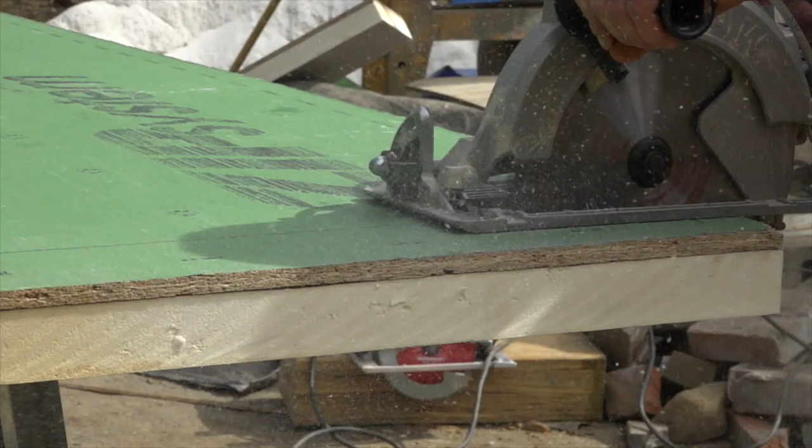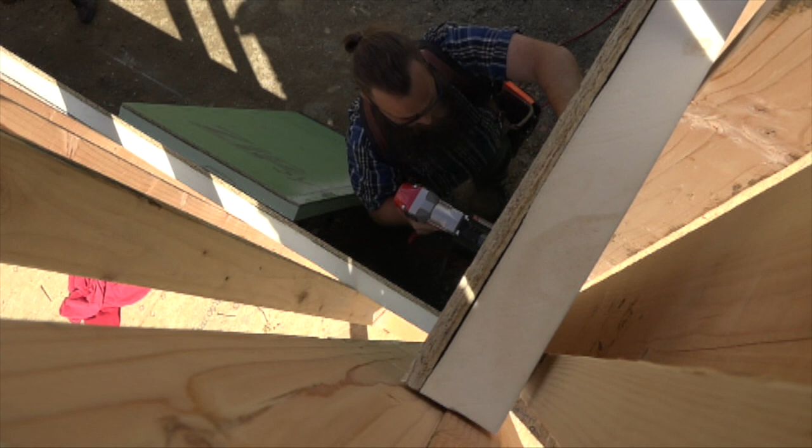Ben is a fan of Zip System's thick R panels. We've used the Zip R3 and R6 a number of times on various projects over the years. We're big believers in exterior insulation. Putting the thermal control layer on the outside of your framing makes a lot of sense. So we're really happy to get our hands on the R12 panels. That's where we're going to break off on this episode, and we'll come back next time with 4 more energy-smart strategies on the roof, in the windows, and around the ducts.

That pretty much takes us toward the end of the Airtight Walls in the Real World section.